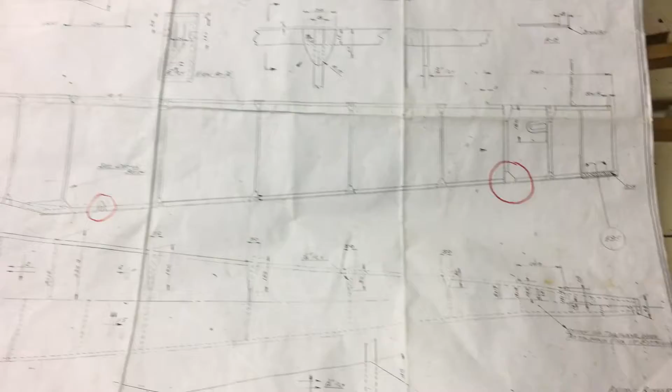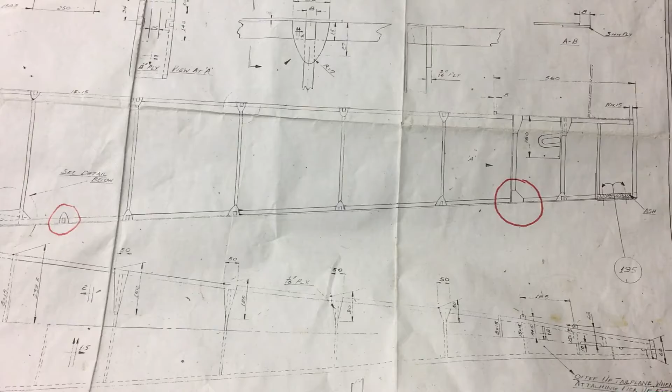So anyway, punchy and quick. Another problem, another mistake. Looking at the plans, this might be helpful to someone working with these particular plans. I've checked the CD and this is the same on the CD.

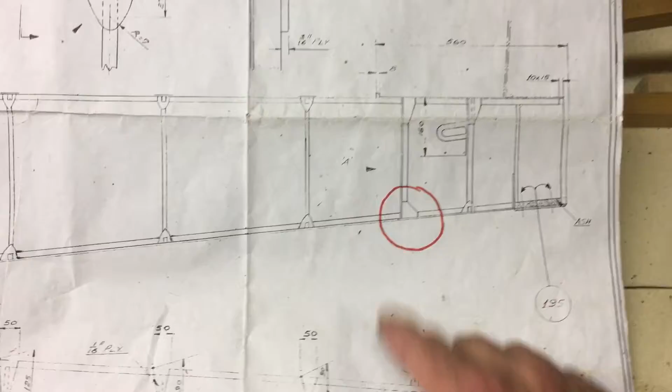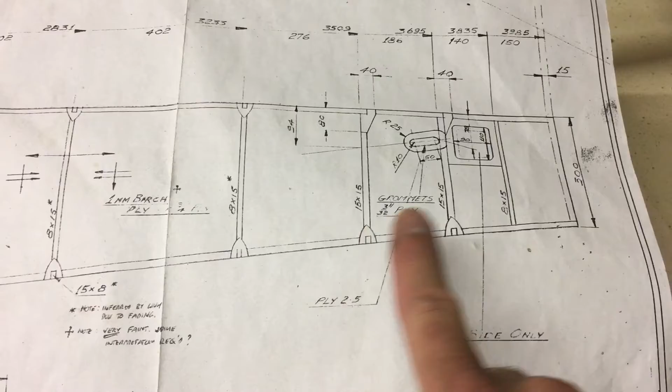So, plans, rear of the aircraft. Here there's a largish kind of a plate, which gusset here, these two here. Now you'll see that unfortunately that is not one of them. Now the reason I think this happened is because if you look at the other view of the fuselage up here, it's got 2 of these what I call bishop's mitre type gussets, rather than one of those.

I think that is incorrect. I think both sides of the fuselage should have one of these, so I think that might be an inconsistency. So what I'm going to have to do is grind that off, and grind off this one, the equivalent on the other side of the fuselage, and remake a pair of these.

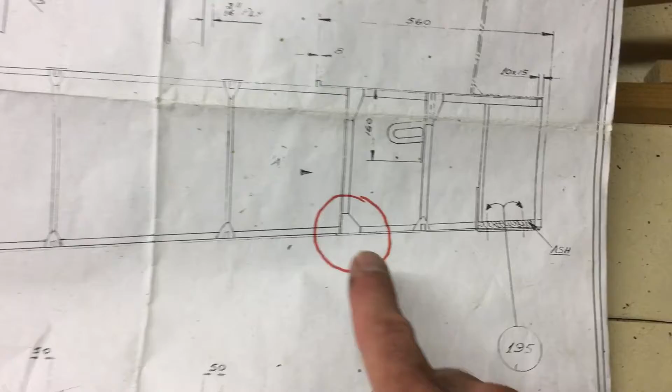It's probably not a bad thing to at least make something for this whole exercise, because they're needed elsewhere, and I do have in the bits I've got this little bit made up already. What's not visible here is the fact that there is, I think, a cross member that carries across between these two. It's not very well drawn really.

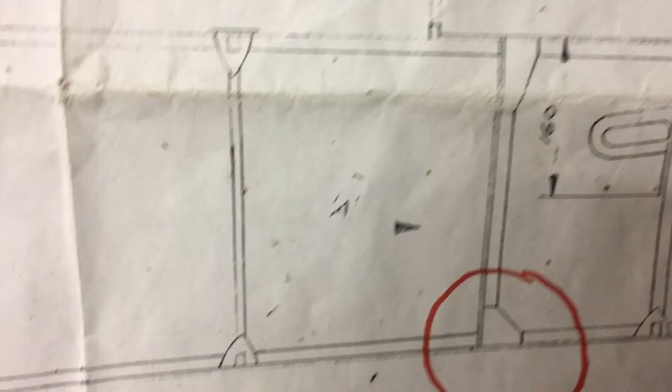This one has a cutout for a cross member that goes across the top, so it's a 15 by 15 piece, which I think is... looking at the alignment... oh hang on, sorry, I'm wrong there. Looking at the alignment, hang on sorry, go back. It's hard because I'm looking at the camera and looking at this. So that is that chunky piece there, goes across there.

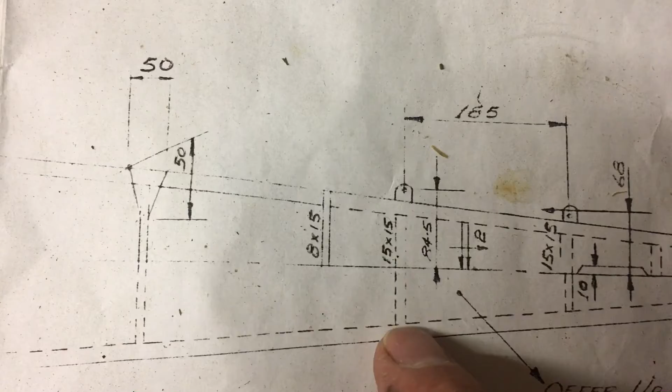Now, you would expect there to be another one at the bottom. So I'd expect this part here to have a cutout like that, so we can carry across another 15 by 15 piece, like that.

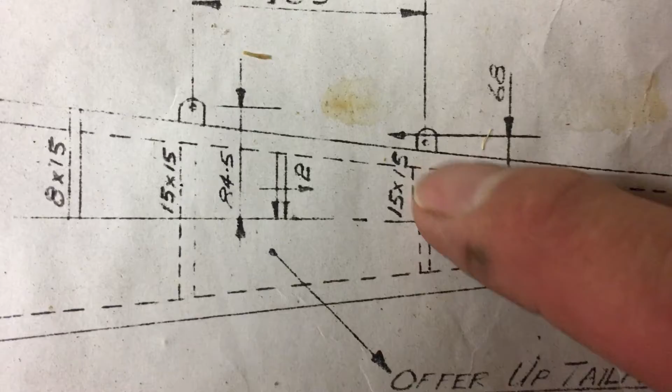Because if you look at it further back here, you've got a 15 by 15 shown there and what looks like an 8 by 15 there, and that would be the 15 by 15 cutout on this one, here, and the 8 by 15 at the bottom. So you've got the difference shown, but there is no difference shown here. So I think that should have one, because this is shown without a cutout, but it clearly does need one.

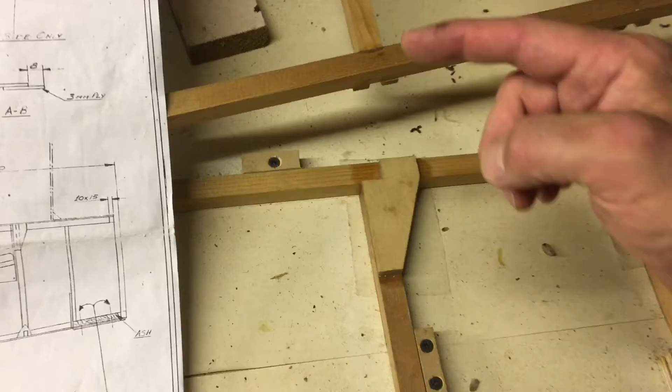So I think this one needs a cutout, and I think it needs to go on both sides, and then we have a sort of a 15 by 15 like frame at the back, and in fact there is then, sorry, I'll just carry you across, that I believe is where this piece fits.

This piece fits into here, more or less. Oh sorry, I'm zoomed right in. Yeah, so is it not, it's not there, is it? No, that's too tight, I can't get it in quite because of that block there, but that's where this part fits in, I think.

Yeah, and the reason it doesn't fit very snugly at the moment is because that isn't right. It shouldn't have that rounded part there. If you look, it sort of oversails the corner where they should go in. It should be that kind of squared off gussety thing there.

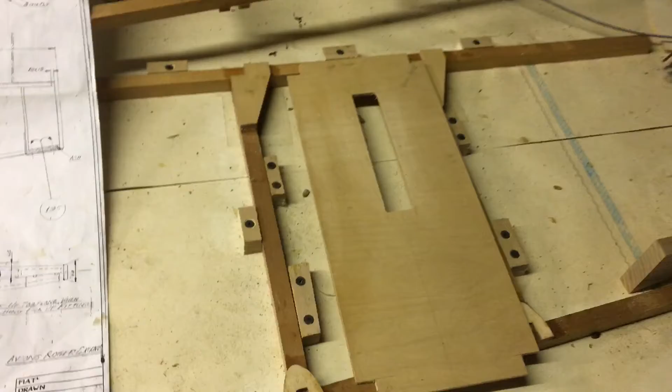So, yeah, annoying. I'm going to blame that - I should have looked at that, but I guess you start from the top and work down the page, and I looked at that and got excited about gluing things together, so I glued it wrong. It's not the end of the world.

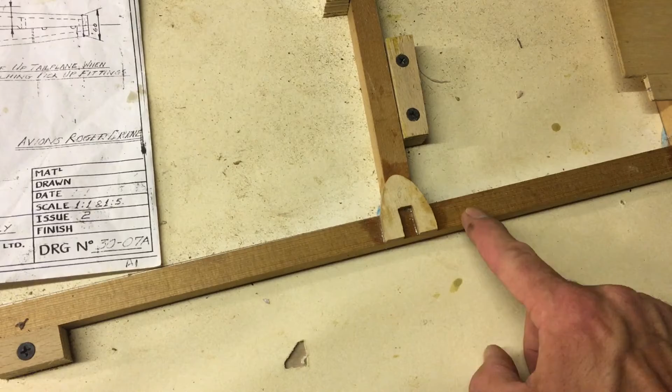I'll use a router, with this sort of router bit set almost about 1 millimeter negative, so I can get in there and machine it away, almost until it's pretty much all gone, and then maybe use a very sharp chisel to lift the rest off and sand it, and we should be good to go. This is probably bonded to this quite well still, where it butts up, so I won't need to reposition these - I think I can just pop the new thing on top.